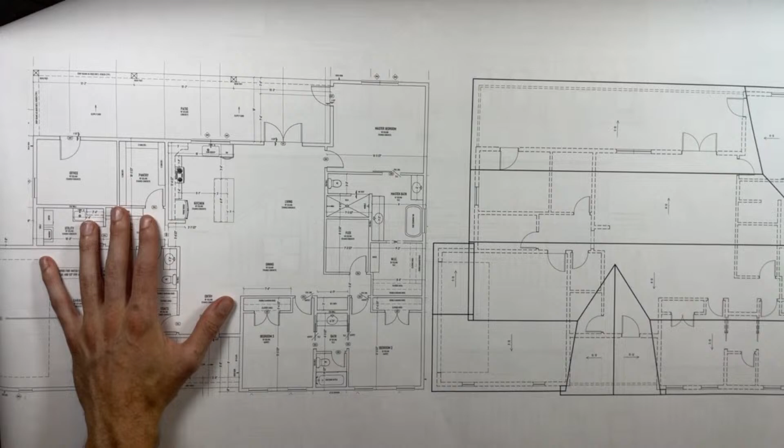Oh my goodness, right in the chat, we got Centurion54X. What's up, my guy? How's it going? Hope you're having a good Friday. It's approaching Halloween and there's lots of traffic on the road. I'm in a college town, so everyone is always excited to do lots of fun partying stuff. And LSU is actually going to be in town in College Station tomorrow. So everyone's excited for football and stuff.

More importantly, tonight we're going to be framing this house with some markers and a scale that is somewhere in this room that I'm going to locate for you guys.

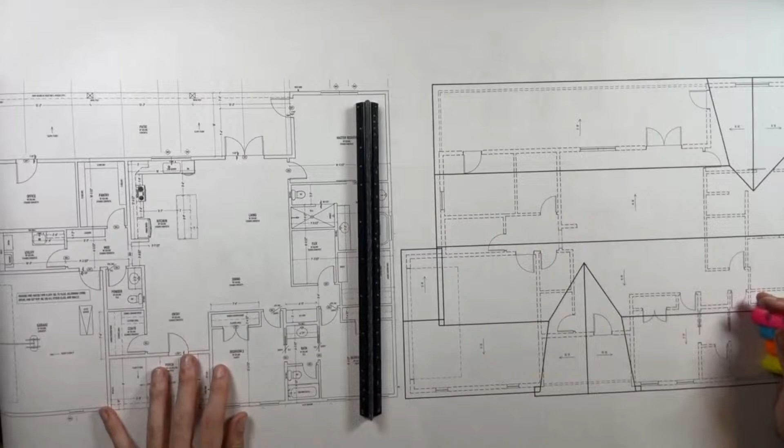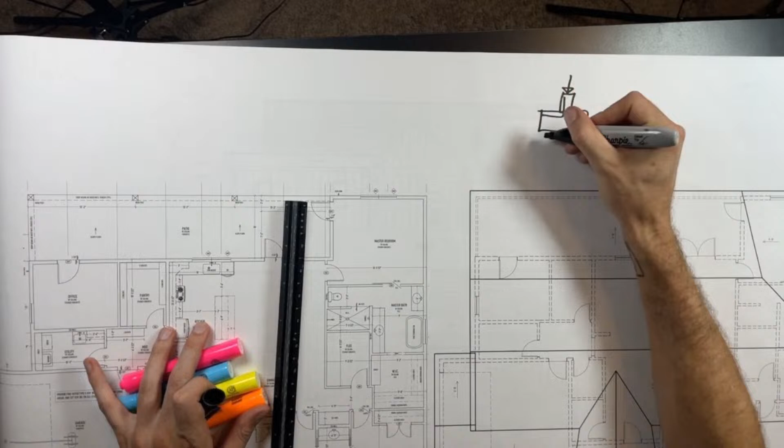So basically what we're going to do is we are going to take loads that are up high. We're going to put them through various framing members, whether they're beams or posts or studs or whatever. We're going to take those loads and the gravity, weight, and all the materials we put in houses, and get those loads safely into the foundation.

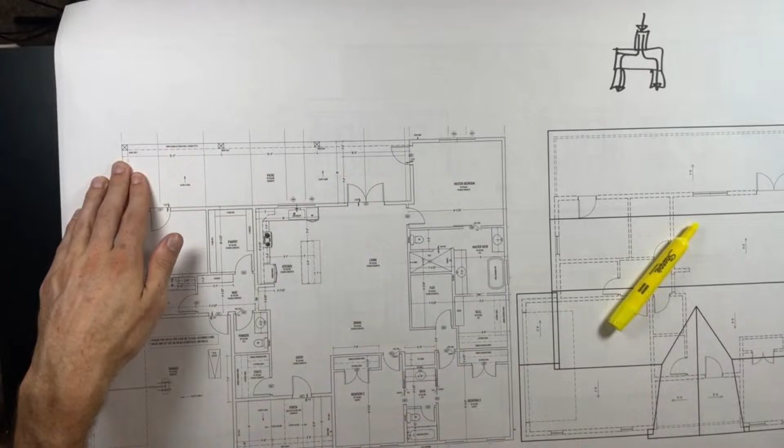That's what we're doing. So we start from the roof plan. Before we talk about the roof plan, let's get a look at what this house is like. So we got garage, porch, back porch, house.

Fairly simple. All right, we got the roof plan. We got a single gable running down the whole house. We've got a small gable over the garage. We got a gable over here, and then a shed roof over this back porch. Should be fairly easy stuff today, guys.

And here's what the outside looks like. All right, so front, it's got this gable look vaulted ceiling. We'll pay attention to that. See, we can see the siding. That's vaulted.

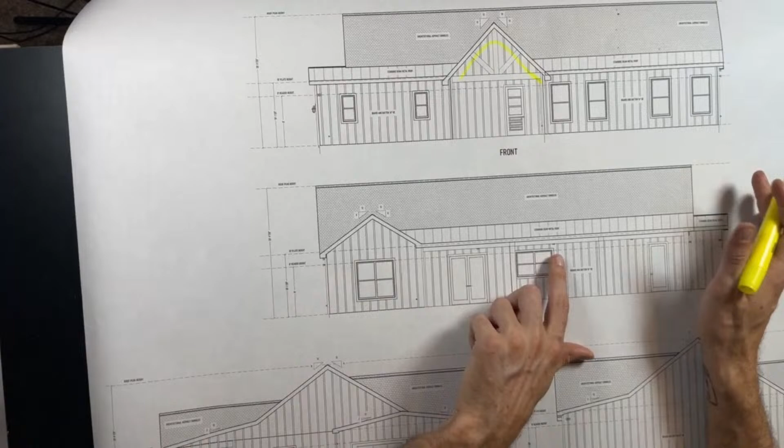All right, how are we doing here? And that's pretty regular stuff going on. We're going to want to pay attention to the different plate heights. It looks like there's 10-foot plate heights all the way around, actually. Oh, 8-foot header height. Yes, the whole thing's 10-foot plate heights. So that's good to know.

All right, so roof plans first. What are we concerned with here? We are concerned definitely with this ridge. That's definitely a ridge we got to hold up. And this is going to be overstack, overframe right here.

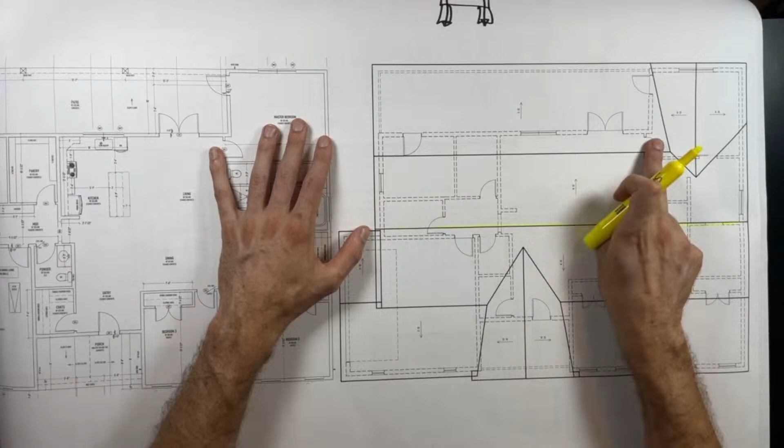Because what I did when I designed this house is I started this roof plane and this roof plane based on this front wall and this rear wall. So I'm going to stack those as real, and then I'm going to overframe on top of that. So that's what we're going to do. That makes our job kind of easy when we're thinking about framing, because it's a very simple setup. I might do something different in the garage here because I've got big open space in the garage regardless. So that's what I think I'm doing. So we start from those things.

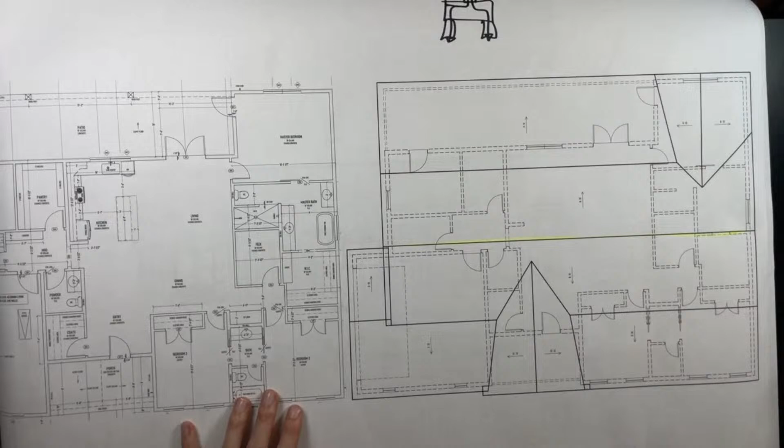We're going to take a look at our rafters. All right, what are the rafters doing? So this chunk of roof, this piece of the rafter is going to be a normal traditional rafter. This piece of the rafter is going to go up on top of these rafters.

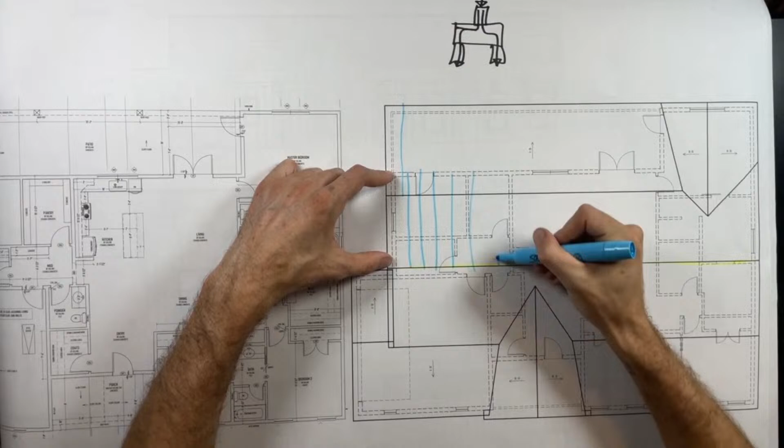So these are going to go from ridge to wall all the way down, just like that. And we'll go to there, and then we would probably stop it in here somewhere and transition to real valleys and hips for this thing.

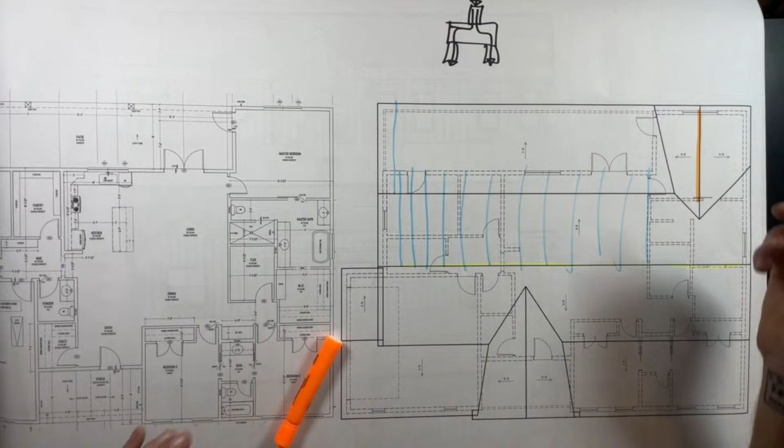That's probably what I would do because I got all these walls to use. I would know that I'm gonna have to hold this ridge. It's a real ridge, so I'll put a beam there. I know I change colors on you guys every week.

So rafters are gonna switch right here to doing this down to the real valleys, and then there's gonna be real rafters. These are gonna be real. Actually, this side, I'm gonna go all the way down the wall, and then right here I'll probably transition and switch.

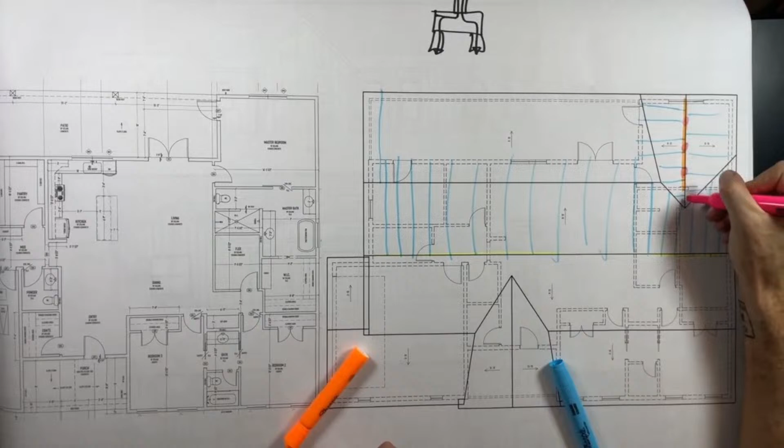So that would mean I'm gonna put a beam in this room. I'm gonna brace and hold up this ridge, put a brace here, put the weight down on the wall. It's really close, so I know I can reach it. Put the weight down on the wall right there. And this is over frame, so we're not concerned with its weight. That's cool, we're good to go there.

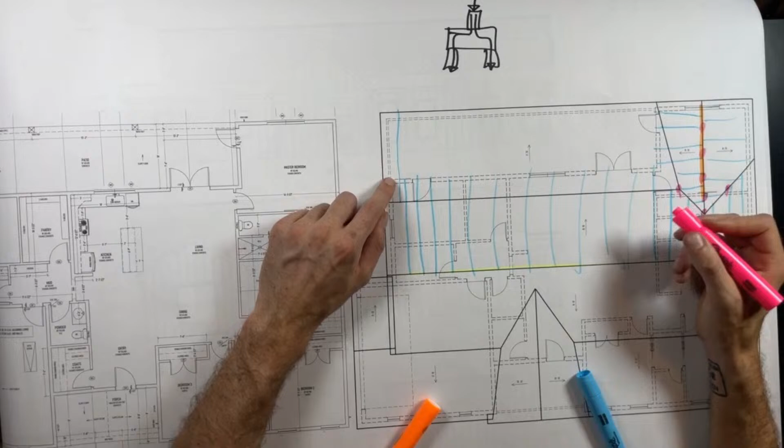And I would basically notate that I'm going to do a bracing, a purlin all the way down this for this front roof plane. The real rafter is actually going to go all the way from here up to here, but I'm going to put a bunch of little blocks in a pony, make a little tiny pony wall looking thing, so I'm basically going to be supporting this all the way down this wall.

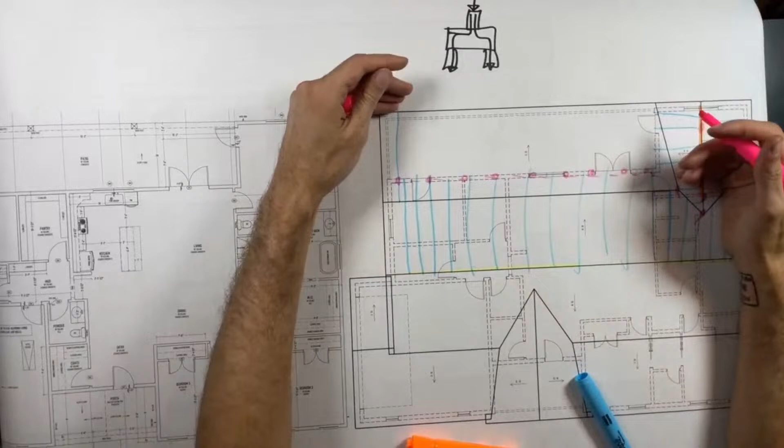This is very common if you're doing additions onto a house. You add a patio cover or something and the roof does this up onto the existing roof. You add little blocks underneath there as a support point.

We'll just double check that we're not going over 11 feet, and we're not, that's 10 feet, so we're good there. Now from here up to here, we're going like 15 feet plus we got extra weight from the additional overstack, so we're going to need a purlin line in this place for sure.

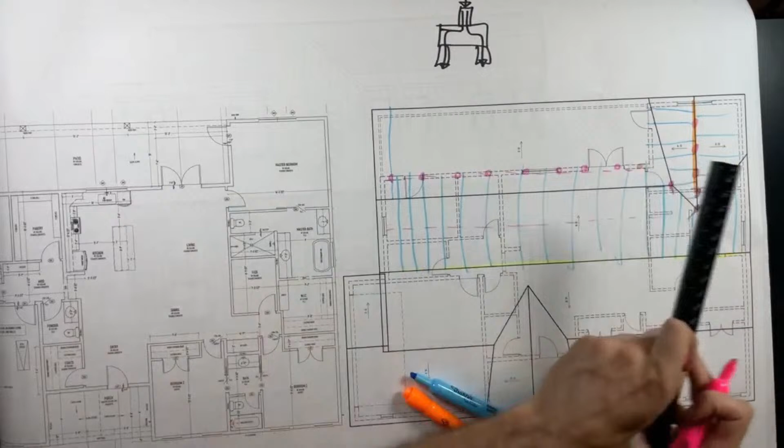We'll just kind of run one basically about in the center, and we're good all the way up to there. So that's fine, so we'll brace here down to the walls.

Let's add our brace points down here, brace the wall, brace the wall. I'm very close, so I know I can reach. I don't have anything in here, but somebody put a nice little wall out here, so I would want to put a beam right there because that's a shorter span than everything else. So I'm going to put a beam crossing the room right there, and that actually allows me to brace my ridge in that location as well.

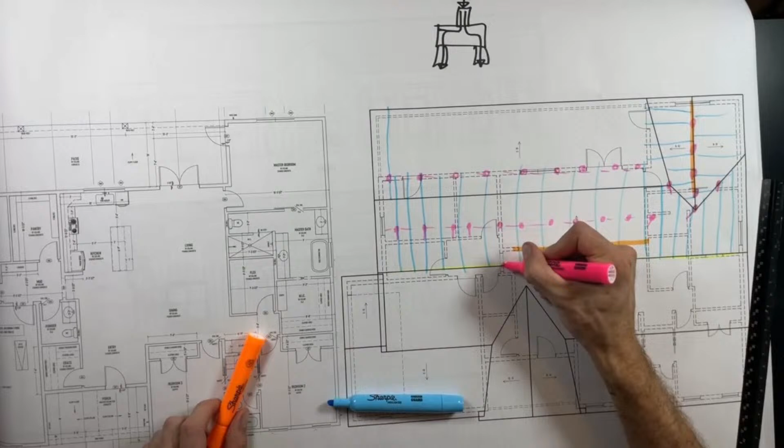So you would space these dots out at 4 feet on center, that would be the proper thing to do. And these can brace down this way. That's on a wall, that's on a wall.

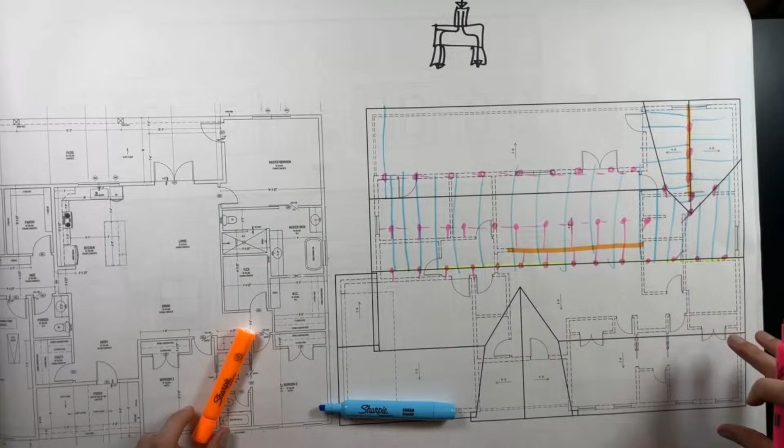And over here, I brace the wall, brace down the wall, brace down the wall. Ridge is pretty good, I can brace the wall here, brace the wall here, brace the wall here, brace the wall there. All right, so we got that line, that line, that line. That's taken care of. Let's talk this side.

Man, what would be the preference? I think the preference is going to be to just frame this like real, not overstack, because the portion of this roof plane that would land on the wall is only this chunk. Everything else, I would need to put a beam, a beam, a beam in order to land the rafters in the same spot.

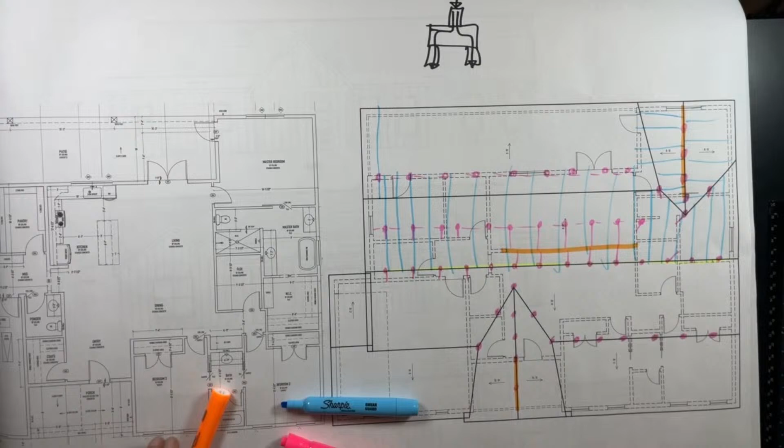Now here's an exception. This is a vaulted ceiling in the front, so we know at the ridge is a beam because it's vaulted, because the ridge has to hold weight. All right, this is going to be real. We're going to go from the ridge down to the wall because we have a vaulted ceiling in here.

So we have to define the ceiling with that. And then this little tiny portion of overlap is going to be overstacked, nothing crazy going on there. And this is all real, so these will just go into here like that. These will do this super normal roof framing in here, and same, we'll keep it normal in here.

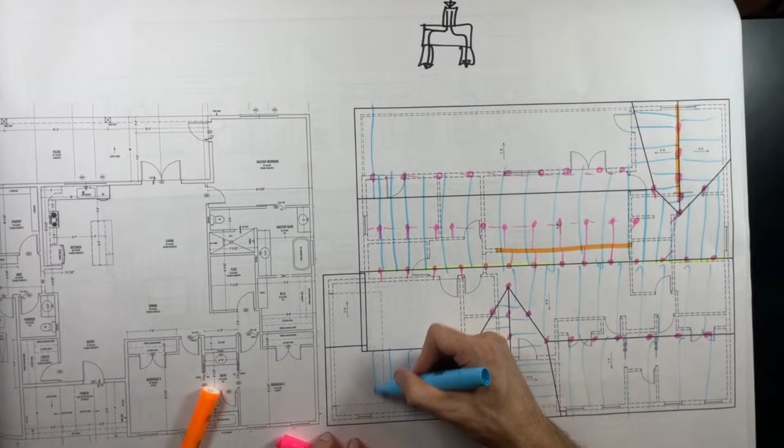Okay, so these are all real hips and valleys.

Let's take a look along this line. Oh, we got a wall. Look at that, we got a wall, we got a wall. Yeah, we could probably reach that wall. This one, we're kind of missing stuff. That one, we could reach the wall. That one's on a wall. This, we could probably reach this wall.

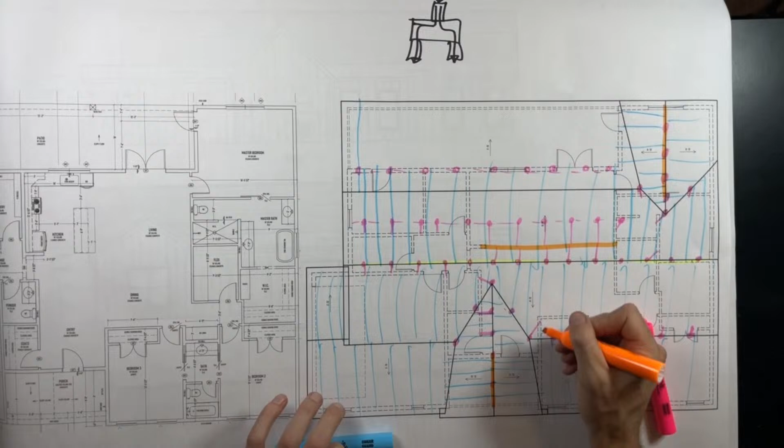So I would probably take a beam and go right in here, stick that guy across those walls, and I'd put the weight down on top of that.

And then I'd look over here and I'd see if we are 13 feet. Okay, so I should probably put another purlin line across this, I think. Well, let's see, yeah, we're overspanned. I don't want to have to add a bunch of beams, so I'm actually going to put a purlin line right here, even though it's pretty close to this, because I've got a wall right below me, and I don't want to have to put more beams out here in the open. So if I just do that, I would be good.

Presuming so, in this spot right here I would brace right there, and I would brace right there. I just like skip that one. It's about 4 feet. Okay.

On this side, I want to add a purlin line, but I don't have anything in here, so I'm just going to have to probably pick a spot. Let me think about the beams in my garage.

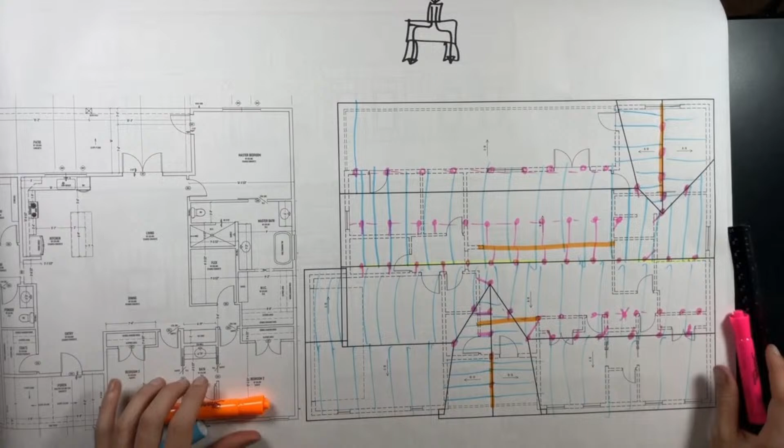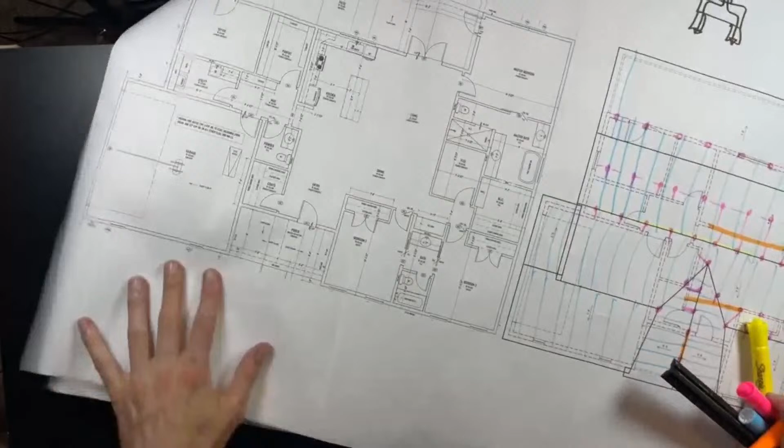Okay, so there's a gable wall right here, which is this guy right here. All right, so what we're seeing is that, hey, at the garage, this side over is all sitting on top of nothing unless we put a beam under it. So what I would probably prefer to do is take a beam and run it right in line with this wall. I'd carry that beam in line with that wall all the way down, that's what I'd probably like to do. And then I can just put all the stuff right on top of that, frame my gable wall up, no big deal. And it gives me another place to put a beam so I can cross the garage.

And in this case, I would probably need a hanger to make that connection, or I could set it on top. Either way, I probably got decent amount of height.

And we're going to brace this guy down to the beam. That's a gable wall below. This guy is going to need something, it's very short, it's probably going to need a small beam. It's really short because it's only a 2/12, so there's not very much height in there.

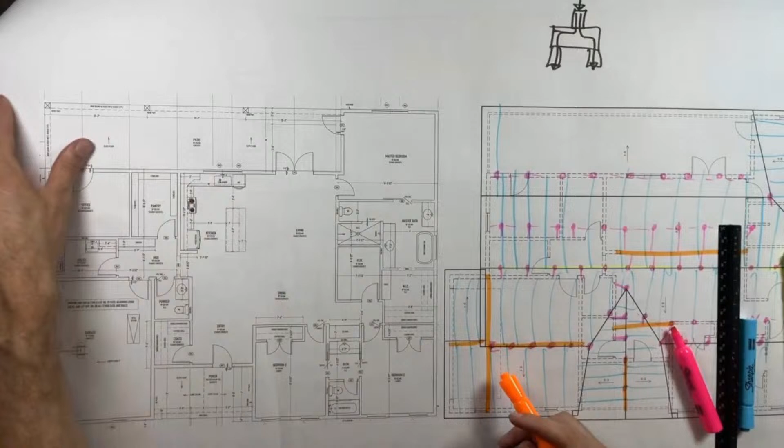So this is basically like some tiny little blocks are going to go in between the beam and this ridge. Basically, that's what's going on in here. So that ridge is held up, that ridge is held up, that gable wall is held up.

And I'm probably going to add another beam in here because I do need another purlin support thing. Well, actually, I'm going up the roof, so I've got some height, so I'm going to put it up here. That's my purlin line for supporting the rafters, and I'm going to go over this wall.

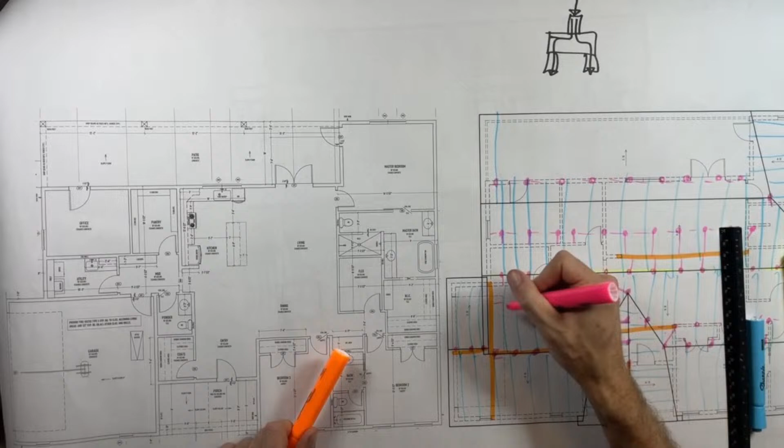That's what I would do, that would take care of that section. So this half, I put the purlin line down low because I had a wall. On this half, I put the purlin line up high because I had a wall up here.

So trying to avoid adding beams, and that's overstack, that's real, that's braced. Cool, we're good to go.

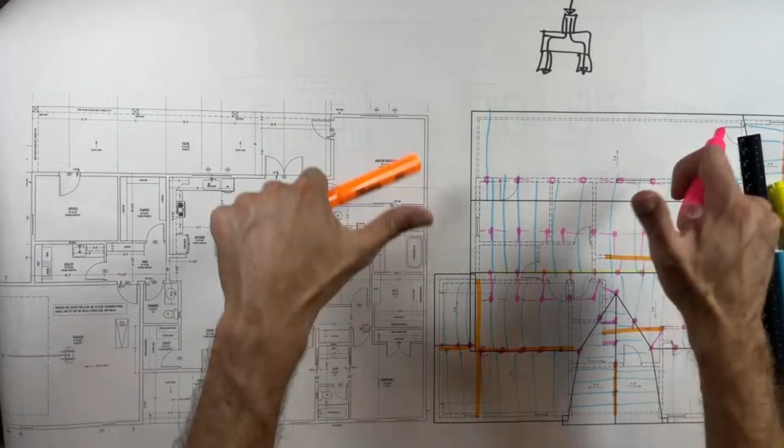That takes care of the roof plan. Now, let's copy our beams over.

What we're going to do here is we added a beam in the garage ceiling. These are definitely going to need hangers because there's almost no height here. So there's one going down the middle and a little one going here. And then we had one crossing the living room at this wall, which helps us with our ceiling.

That's nice. We're probably going to want, well, we got one here for the roof. And this is vaulted, so I wouldn't put a beam in here. There's no ceiling. The ceiling is designed right here.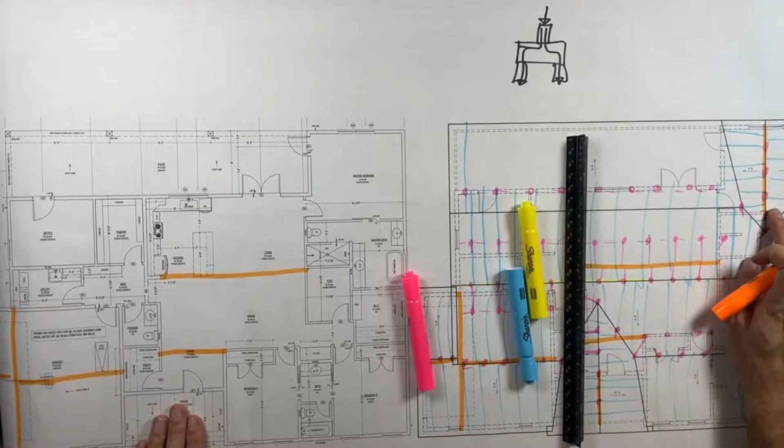And I had one beam over here, so there's one in the middle above the ceiling. All right, and of course, there's beams doing the patio. Always, that's how we frame the patios. And there's one beam right here.

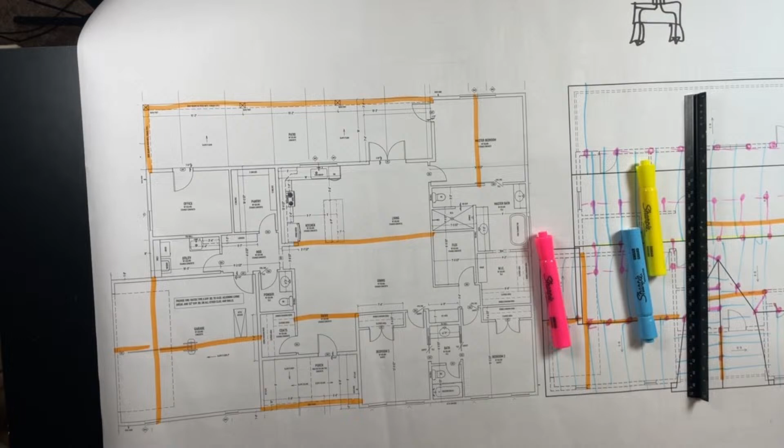So that would be the official, all the beams, unless we need more for ceiling, which I don't think we're going to, because here's how I'm going to lay out the ceiling.

Let's see, we're going to go front to back in this whole zone because that's what the roof is doing over here, front to back. And we're going to go in line, stop on those walls.

And porch here is vaulted. This little section will go front to back because it's short. And we'll carry this front to back over to there. And then we'll run front to back through this whole section because it's the shorter span as well.

Through these rooms, might as well cross front to back over here. Same thing through the living room, front to back.

And then over here in the garage, everything's running right to left. So I will do the same thing. I'll put ceiling joists in like this.

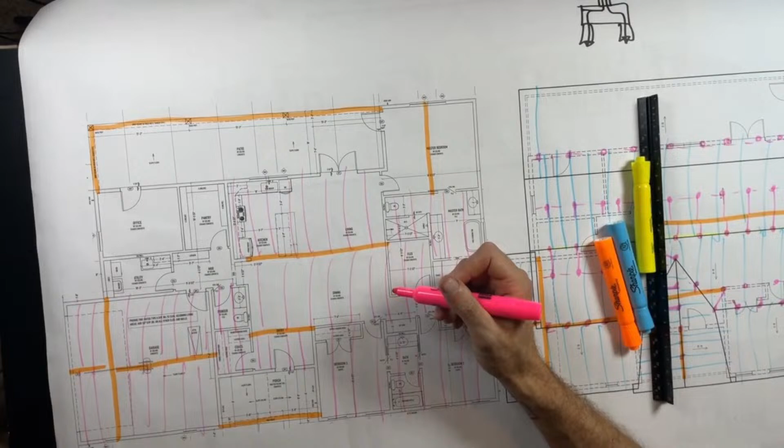Okay, so these beams are going to be flush with the bottom of the ceiling. And then over here, again, everything is going front to back. So this whole porch is going to have a ceiling doing this.

And I might as well run this whole section. And even I could do this whole section is less than 20 feet, so I could do this in single sticks. I would like to do that.

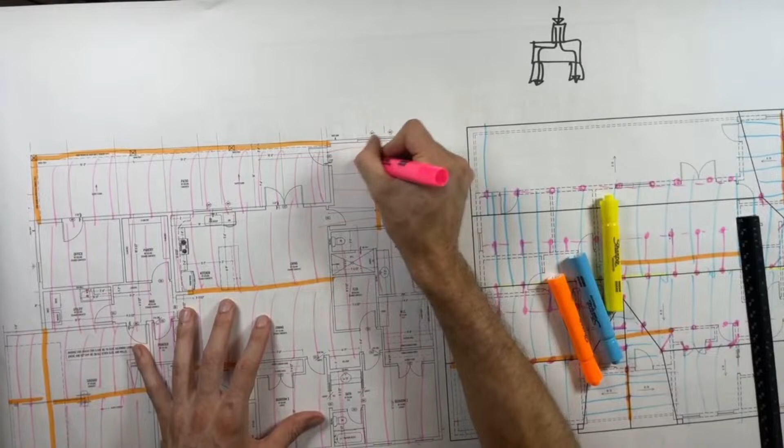Over here, we could go either way. The roof is going right, left, so I'm just going to go right, left. I would either run these straight across and pick the beam up and run these below the beam, or I'd drop the beam down and use hangers and attach these to the beam. Both good ways to do it.

Okay, so that takes care of the ceiling joists. All of our spans are going under 14 feet, so there is no span issues here. 2x6s, 24 inches on center, southern yellow pine number 2.

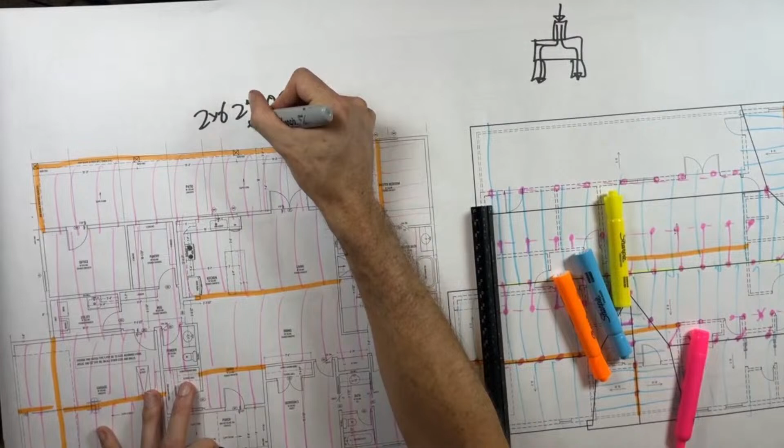24 inches on center, southern yellow pine number 2, straight out of the code. All right, 14 foot, 11-foot span ratings for using this on both cases, and a pretty simple little spec home. There's not any crazy stuff going on here.

This will probably be the most expensive beam in the whole plan because you're carrying like this huge chunk of roof and you're carrying this huge chunk of ceiling.

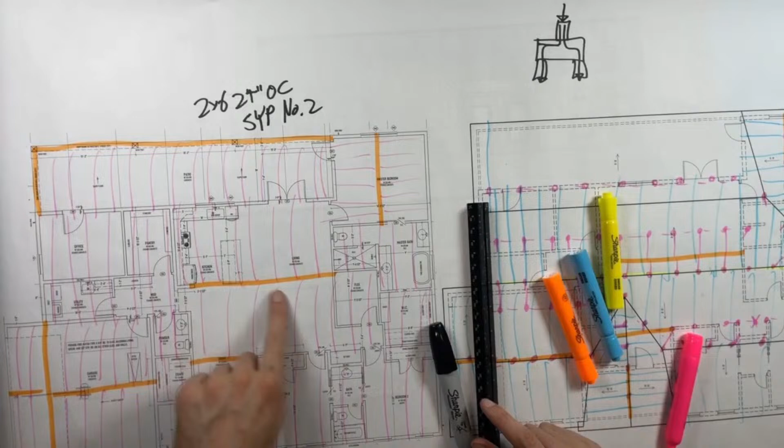Attic access is over here in the garage, which works out. Oh man, I just had a panic moment because I was like, oh, their attic access door is over a low roof. They can't even get up in their attic, but it's tall over here. So we'd look at the roof and we'd say, well, they're going to get up in the attic right here.

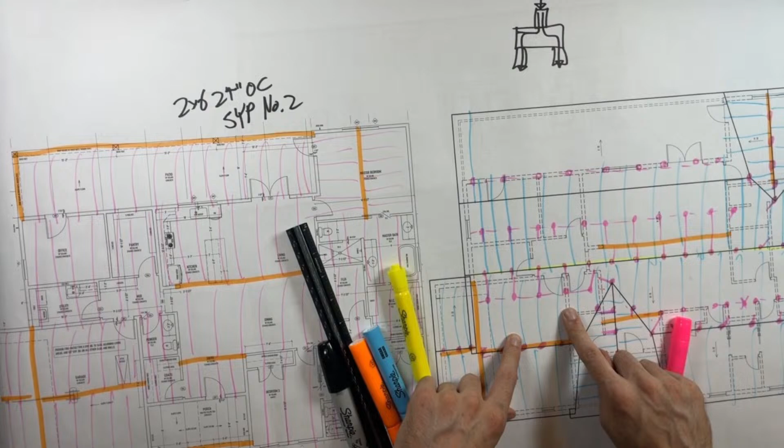And so let's assume they want to store a bunch of stuff over here. And all these walls are nice and close together, so maybe you bump up this section to 2x8s or something, or 2x10s. You could do that if you wanted to give them a nice storage space. Most of the usable storage space is down the center of this house because of this roof. But that's all we got.